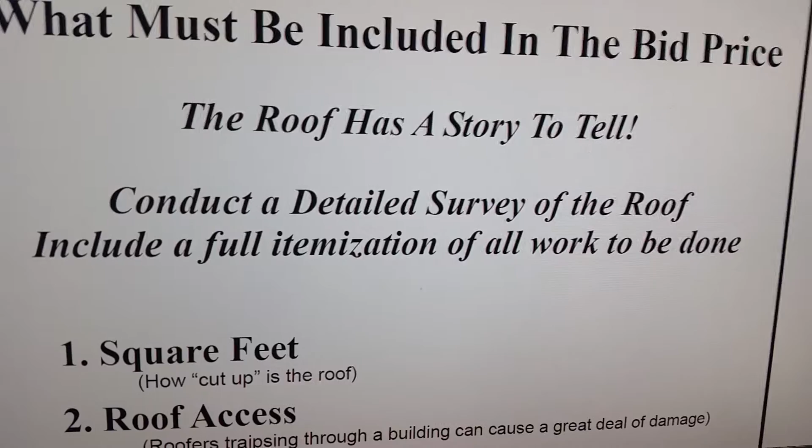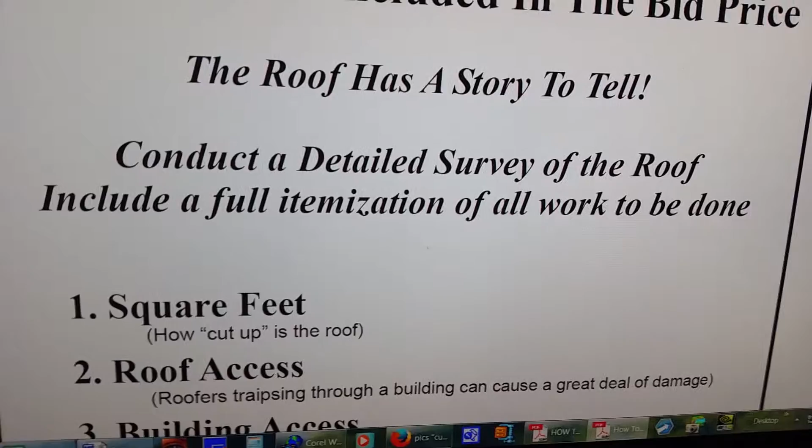In other words, you got to include a full itemization of all the work that needs to be done. You've got to pay attention to everything and think in these terms. It's very important that you make sure that everything gets included.

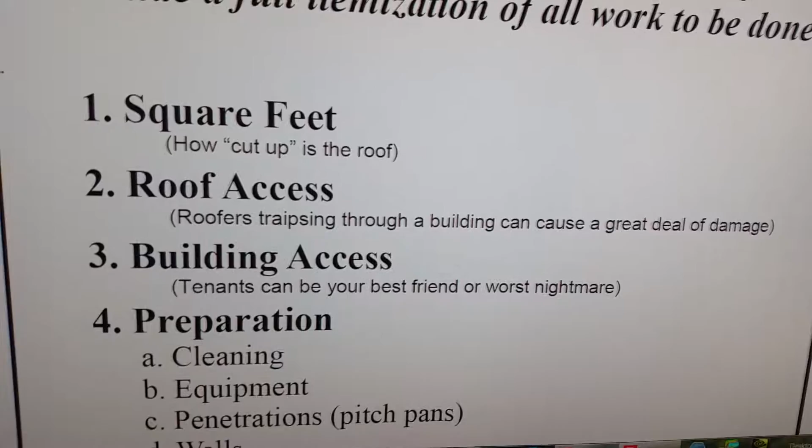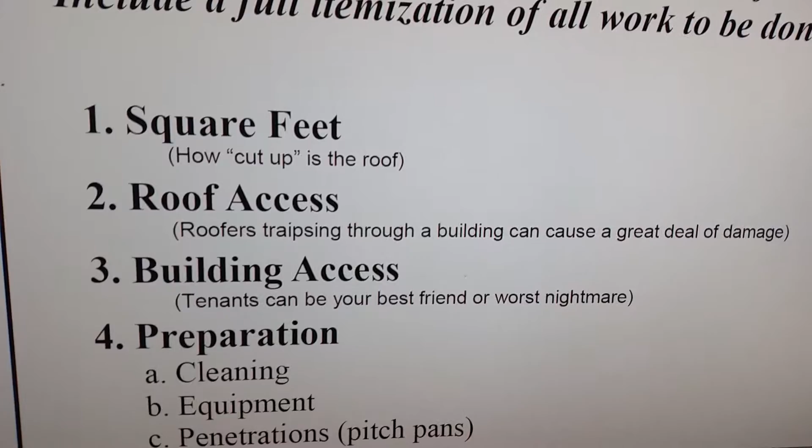So number one, you don't just add up the square feet. If you do, be sure to add the walls, put a little in for the slope. Make sure that if the roof's really cut up, that you add in for that. That can add a lot of time and materials to the job, and it can give you logistics problems we're going to talk about coming up here.

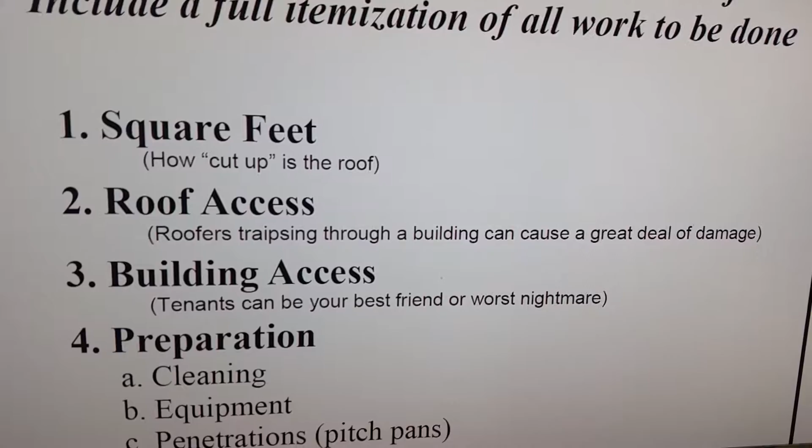Also, roof access. How are you going to get up on the roof? Are you going to need a 32-foot, a 40-foot, a 28-foot ladder? Don't bring a knife to a gunfight.

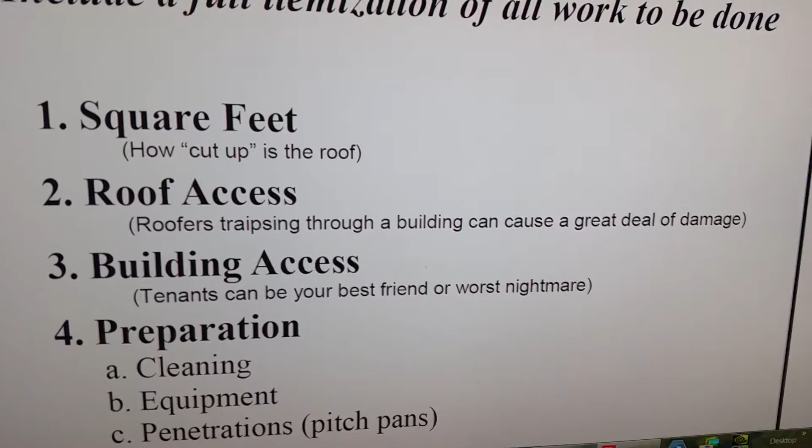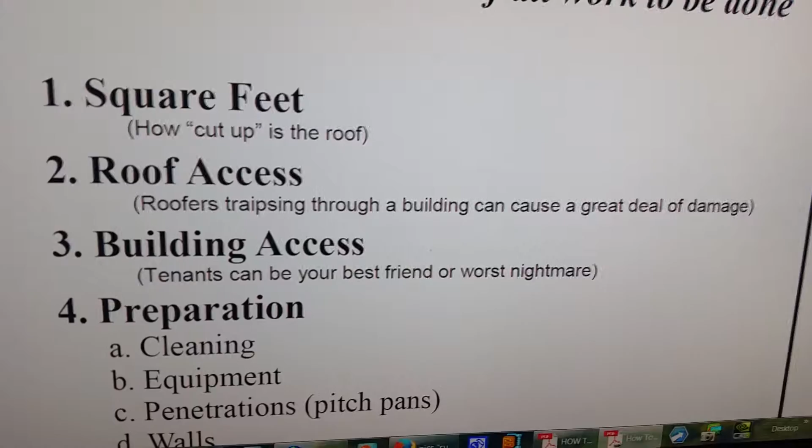Another thing to think about is roofers going through a building can create a lot of problems. You're going to get a lot of mastic and coating and junk traipsed on brand new carpet, and believe me, that does not go over well, and it's really hard to clean. You've got to use an odorless solvent, which is questionable at best. Anytime you introduce any solvent inside a building, that creates all kinds of problems.

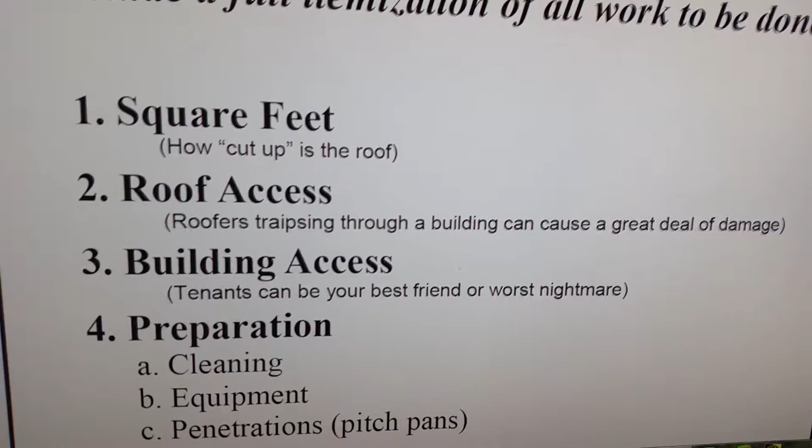Also, building access. Where are you going to set up? It's really good to get to know the people inside the building and find out before you start bringing in a bunch of equipment where you're going to set your equipment up. How big's the roof? Are you going to have to run 1,000 feet of hose to get from one end to the other, or are you going to be able to set up in the middle? Where's a convenient, secure area to set up that you're not going to disrupt the normal ebb and flow of traffic of tenants in and out of the building?

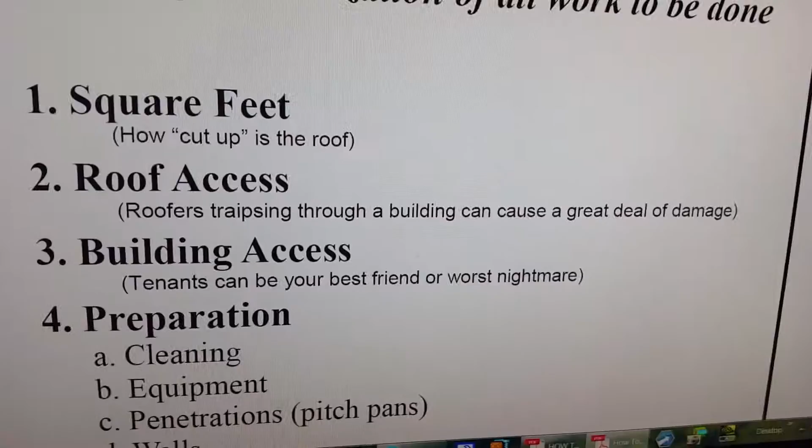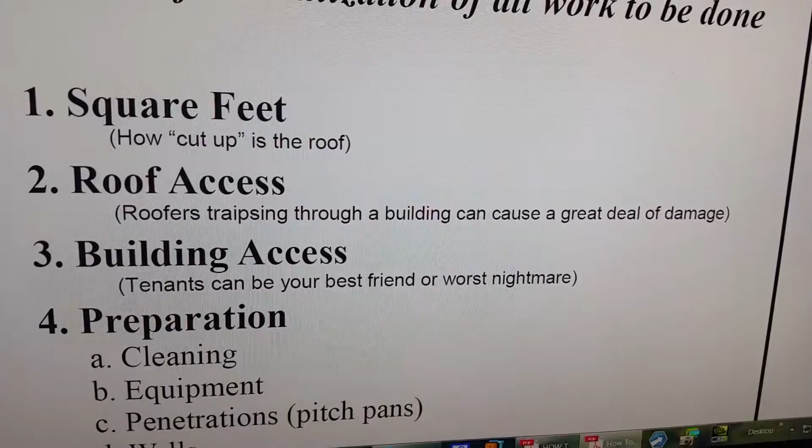This is key. Again, does the building have a forklift? Is it a warehouse? Is it an office building? You're going to have overspray on cars. If you're not communicating with the tenants, you're going to have a problem, because tenants can be your best friend or your worst nightmare. Also, number 4, be sure to include the preparation.

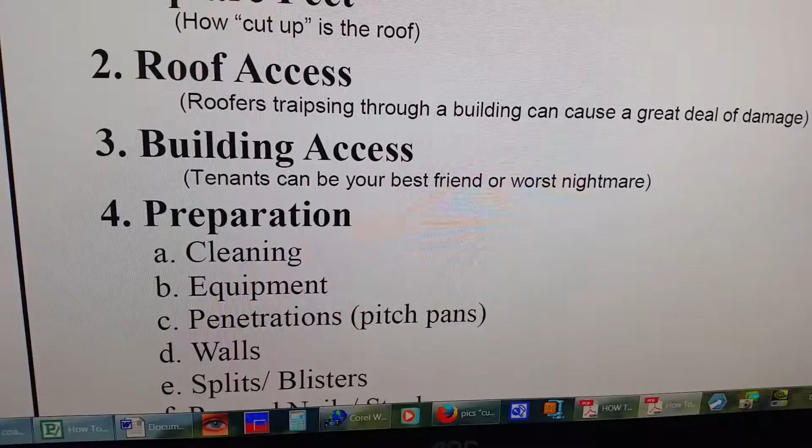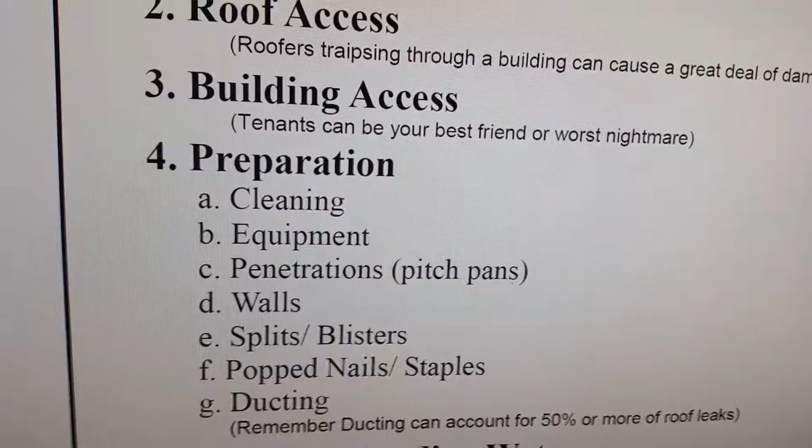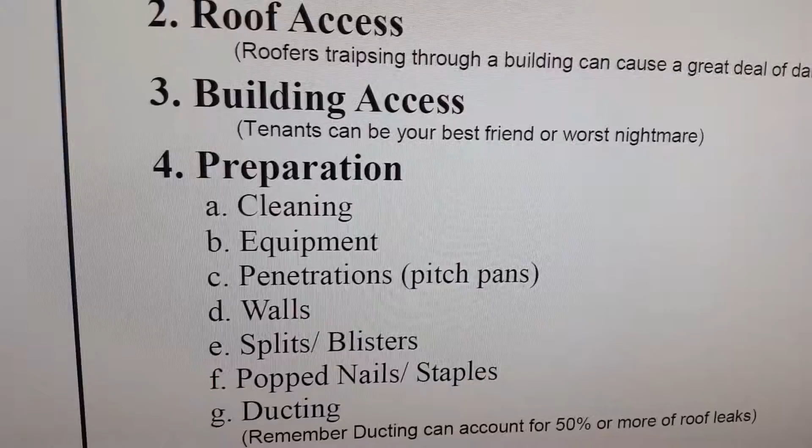This is very important. This can make or break a project. Cleaning - are you going to pressure wash it? Of course you're going to pressure wash it. You always pressure wash before coating. This idea that you can just go up and garden hose or coat over a dirty roof, or say we just need to blow it off - that's BS. Don't do that. I've seen these coatings peel off because of improper preparation.

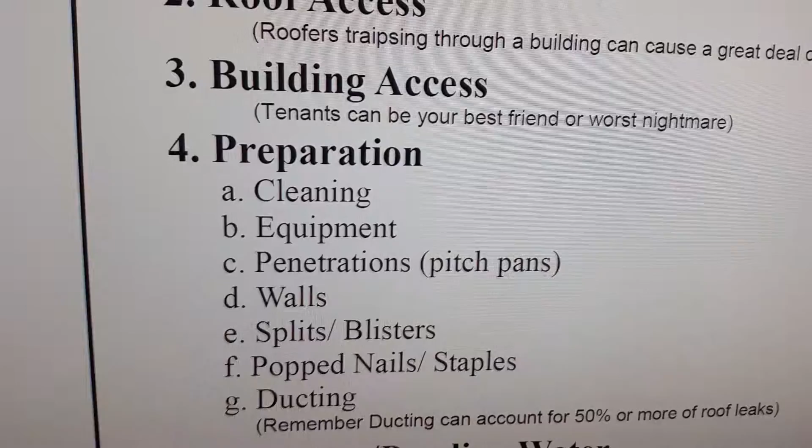Huge problem. Also, equipment - what kind of equipment is on the roof? Make a detailed list of equipment. Take photos, lots of photos, because you can go back and review the photos. Take lots of notes. Again, you can go back and review your notes before you do your bid or while you're doing your bid. Penetrations, especially pitch pans.

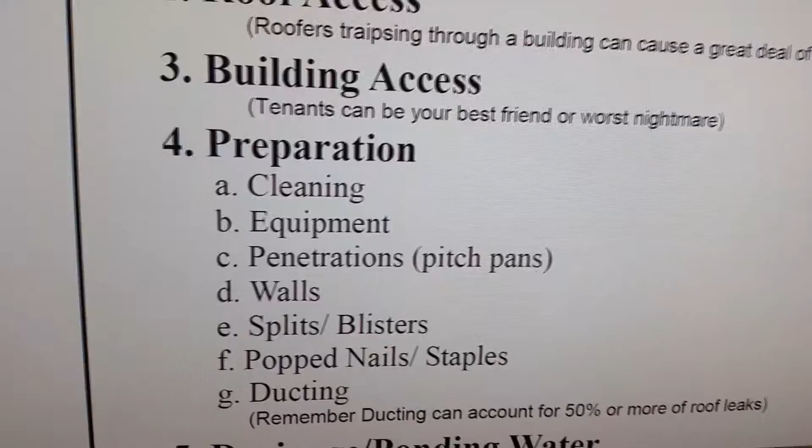Pitch pans gobble up a ton of elastomeric mastic or asphalt mastic. You've got to fill all the pitch pans, about 3/4 to the top. That can cause a lot of extra work and a lot of extra material.

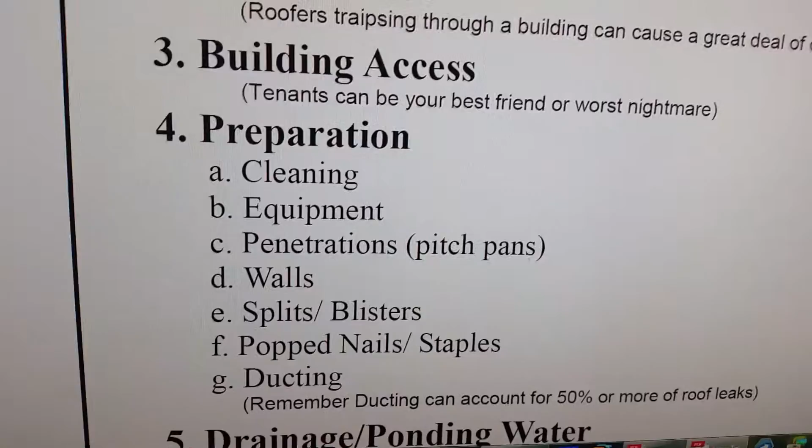Walls, what are the walls doing? Are they coming apart, splitting? What kind of problems are on the walls? Be sure to include the walls. That's a lot of material, and it's going to be extra material you may not account for.

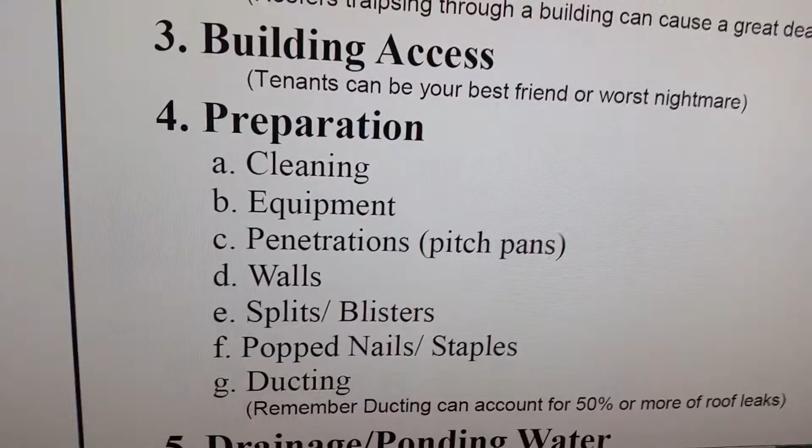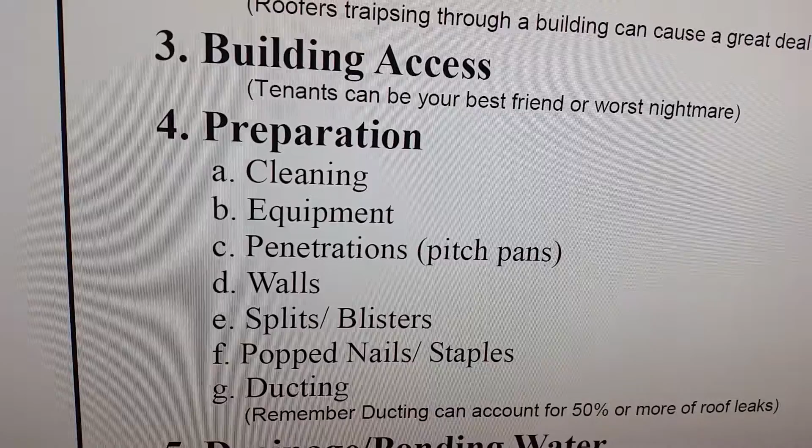Splits and blisters. A lot of people think a blister is the worst thing on the roof. It may or may not be, it depends on how bad it is. A blister is telling you something, is there water intrusion? Splits are telling you something too, is the building moving? What's causing these splits? It's a good idea to put a little slice at the end of the split to stop it from splitting any further. It's a little trick that'll save you in the long run, because splits will just keep on going. So you've got to address the splits.

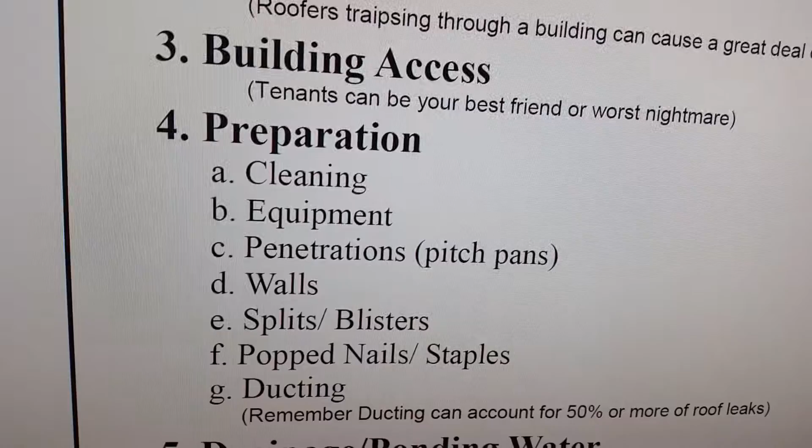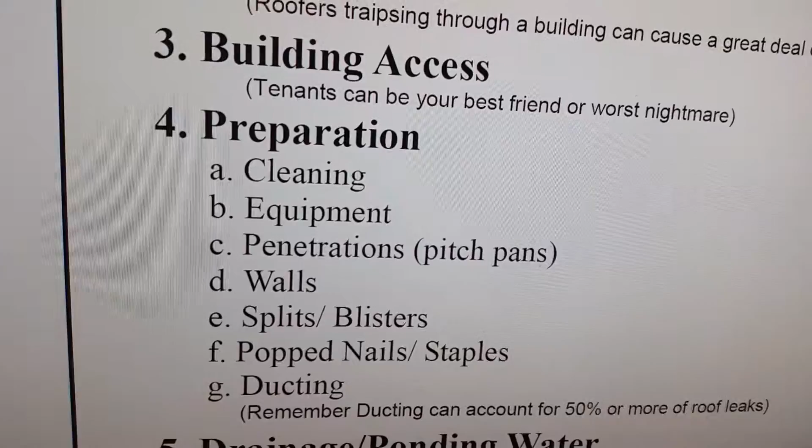Popped nails and staples. Why are those nails and staples coming up? Be sure to look at that. Now you have a problem, the roof is not being held down. What are you going to do, mechanically fasten that roof? Ballast it? Put rock on there? Pay attention to these kind of details. Why is it doing that? How much movement is there? Is that going to create a problem in the future? Can you just coat over that? Probably not. Remember, a coating doesn't fix all these problems. You've got to address all these issues.

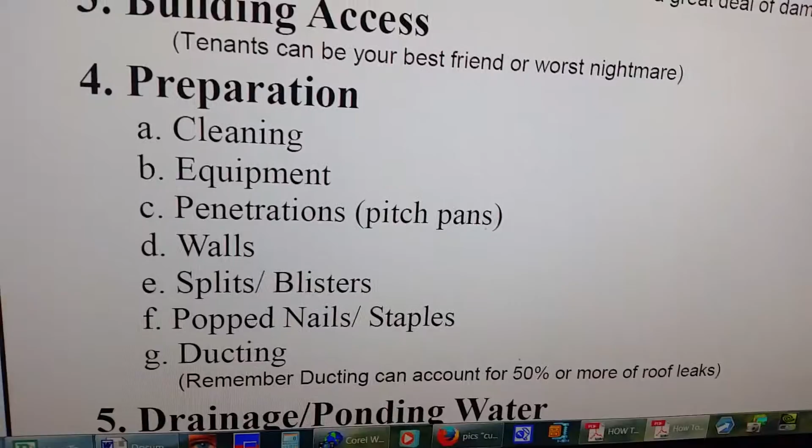Ducting is a huge problem. Tenants and building owners don't want to hear 'oh, it's not my fault, it has to do with the ducts.' Just do the ducts, I always include the ducting. You can make more money by doing the ducts. Remember, they can account for 50% or more of roof leaks. Why wouldn't you do them, right?

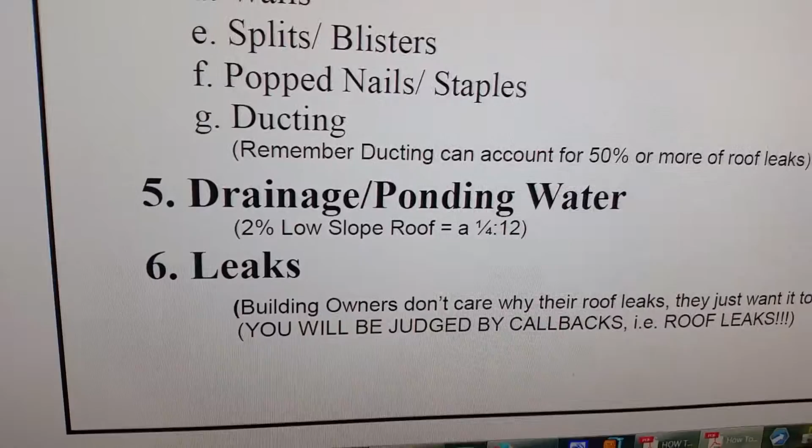Ponding, drainage and ponding water. The problem is these are 2% low sloped roofs, about a 1/4 and 12 slope, which is hardly anything. You've got to account for this. Make sure the coating you're going to use is guaranteed to work in ponding water, not just peel off or delaminate, or you'll have to go back and fix a whole bunch of problems and end up with an angry tenant or building owner. These are issues that have to be addressed. Is there structural issues dealing with the ponding and lack of drainage? Are the drains clogged? Does it need more drains? You've got to pay attention to this information.

Again, the roof is telling you all this information. It's your duty and your responsibility to interpret that and to judge accordingly.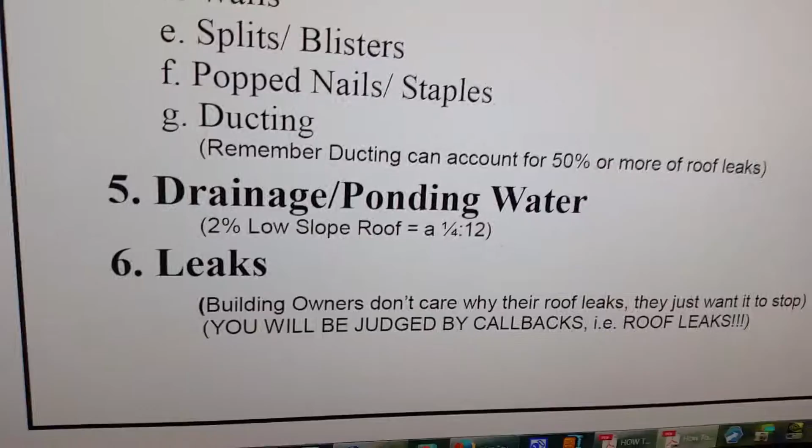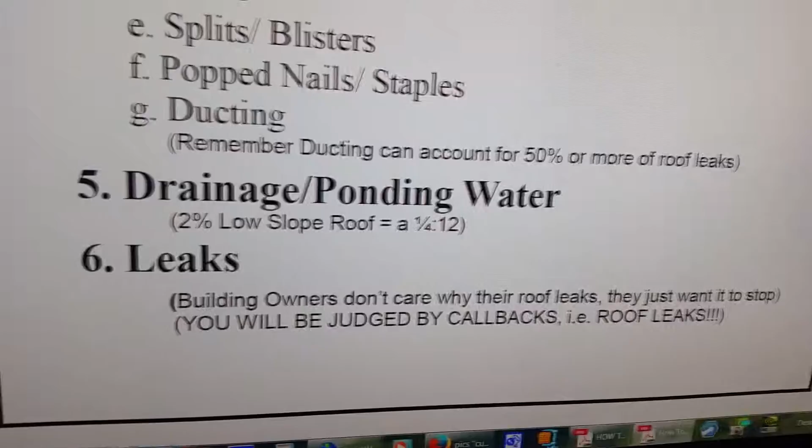If you know the building has leaks, by all means address those leaks first. Be sure to fix all those leaks, find out inside the building where those leaks are, make a map. Talk to the tenants, you've got to become friends with them, you've got to work with these people. If they're your enemy, your job is going to be 100 times harder, guaranteed. Find out where these leaks are, address them, fix them.

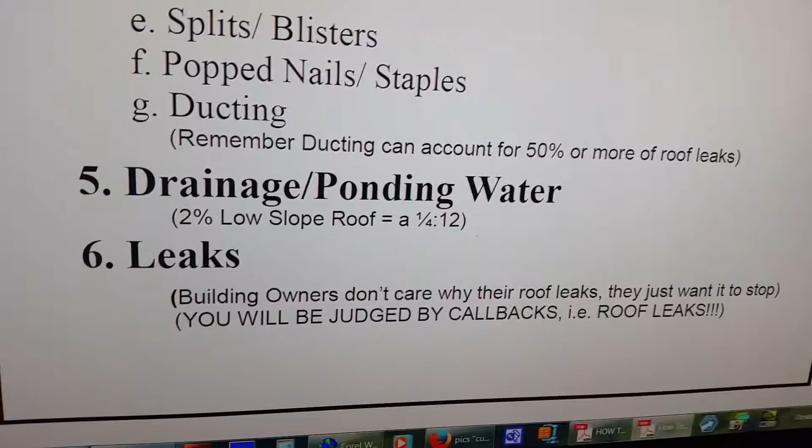Building owners don't want to say 'you just fixed my roof and it's leaking again, you've got to come back out here.' You don't want to hear that. Callbacks are the worst thing, you're going to be judged by your callbacks, it's part of your reputation. Is the roof leaking after you've done all your work to it? If it is, you did something wrong. Simple as that. Again, this is Mitch Watkins, the roof coating guy, looking out for you.